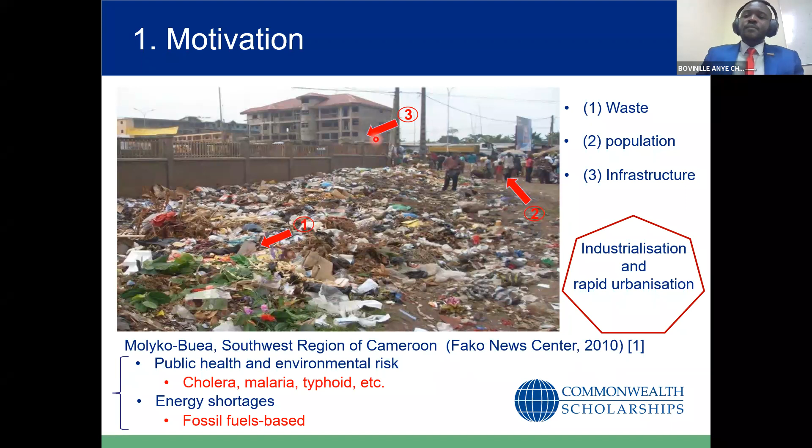Also, the continuous dependence on fossil fuel-based energy sources to meet up with the energy demands of these rapidly developing countries has brought about serious global environmental challenges, such as resource depletion, environmental degradation, and energy shortages. So there is an urgent need for clean and renewable energy to meet these energy demands such that we can have electricity generation, transportation, and heating in a sustainable manner. With this in mind, my target is to achieve this clean and renewable energy by simultaneously treating waste organics while producing clean water and energy.

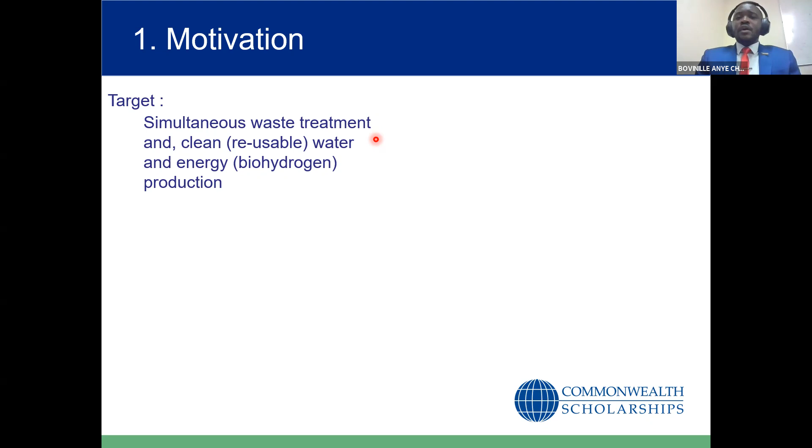Now, to visualize this concept, I put forward this schematic where you can see a typical source of waste stream, in this case industrial wastewater, being biologically treated by two major techniques: dark fermentation and photofermentation. The main difference between the two - let me start by saying fermentation is just a process whereby a microorganism can metabolize or feed on the organic portion of the waste stream. And in the process, they release byproducts. Some of these byproducts are biohydrogen, which we are interested in, and a small amount of CO2.

Because the process can either require light or not, it's often termed dark fermentation when the microorganism doesn't need light, and photofermentation when the microorganism requires light.

Having understood that there are two biological approaches to handle this waste and produce energy as biohydrogen, with the residue being water you can reuse for agricultural or other purposes, I also want to point out that what you see here is an indication of a container, a container which houses the mixture: the waste, the microorganism, everything in there.

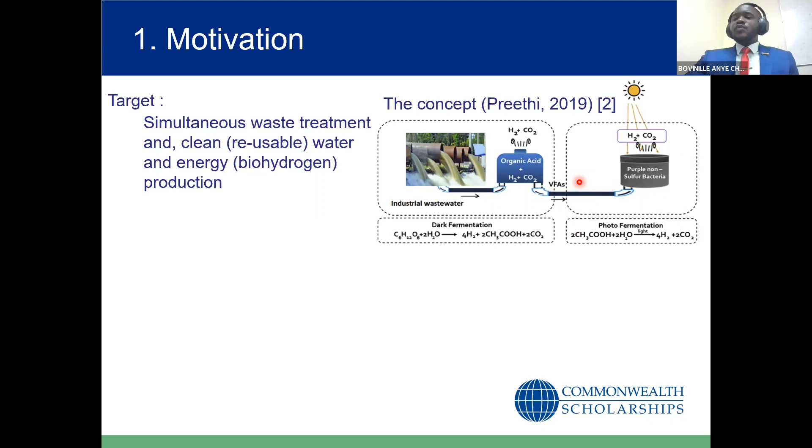But first, it would be nice to see how a wastewater treatment plant looks like. Typically, this is how it looks. And when I say a wastewater treatment plant, I don't want to limit your thoughts—also think about sewage, since sewage sludge is treated in the same manner. The technology we propose can handle all of this. So it's going to look like this.

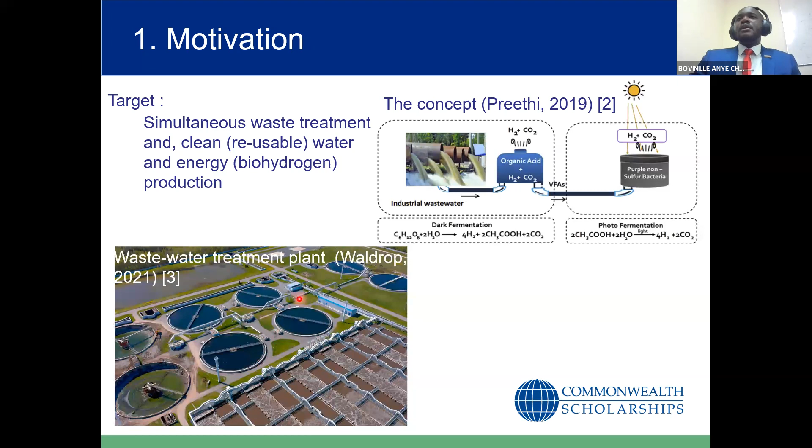By the end of it, we'll be achieving 3 of the UN Sustainable Development Goals: Goal 6, clean water and sanitation; Goal 7, affordable and clean energy; and Goal 13, climate action.

So I guess by now you're beginning to see the significance of the work, why it was awarded the 2021 CSC Research Impact Award for climate change related research.

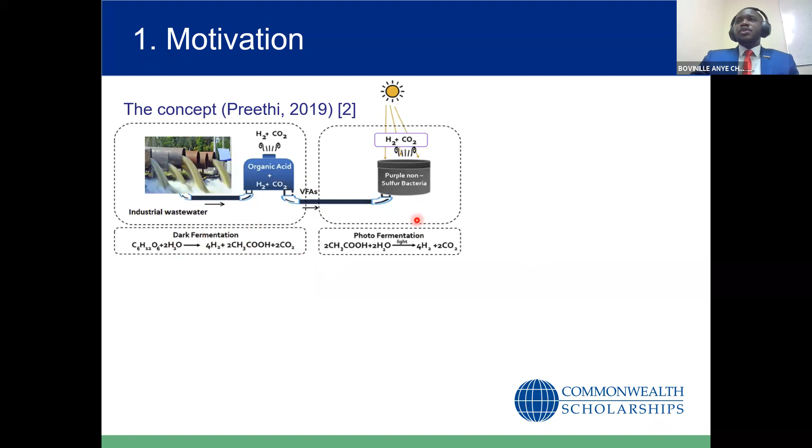But first, let's go a little into the technical aspects of the work. If we revisit the two methods of handling this waste—dark fermentation and photofermentation—and do a comparison, we realize the photofermentation approach is very efficient, with almost 90% conversion rate.

So one is tilted towards photofermentation in such a way that the residue, or end product, from dark fermentation is further photofermented so you can get maximum biohydrogen from the process. Now the obligate requirement of light by this photofermentation process poses significant challenges.

The first challenge is light attenuation. This concept of light attenuation is something you're going to be hearing throughout this webinar, but for now I'd like to put it into perspective so you can see it. Light attenuation is first defined as a physical phenomenon—let me use 'physical' because you can actually see it.

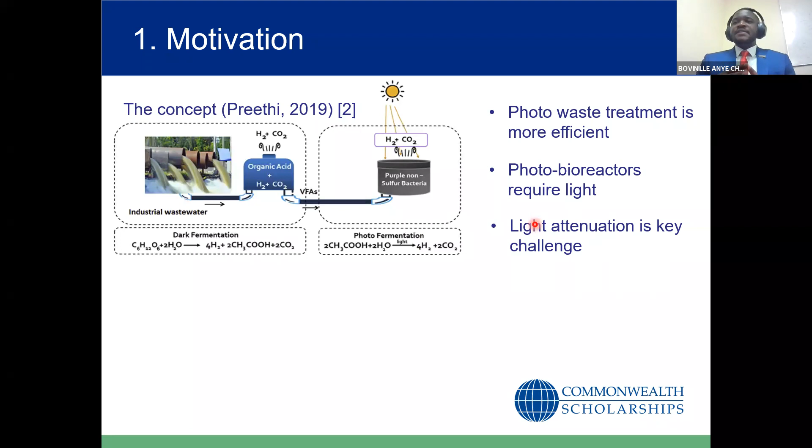The incident light intensity decreases within the reactor. What do we mean by that? At the start of the process, remember the container I mentioned? It's called a photobioreactor now because it allows light to come through. Our light rays are coming through, and we have our waste organics as well as our microorganisms in there.

That physical phenomenon of light attenuation can be seen here: the incident light intensity—this portion has light and this portion is dark. So 90% of the light is absorbed within a few centimeters of the reactor and the rest remains dark. This has consequential effects on the overall productivity of the system because the microorganisms require light.

If they're in the dark region, they're not getting light, so they're not growing. Instead, they use some accumulated carbon source or storage of energy to maintain themselves and stay alive, which we don't desire—we actually want them to convert the waste into our biohydrogen.

At the same time, cells within the region of light experience such high, harsh light intensity that they undergo a phenomenon we call photoinhibition—the light inhibits their growth. It doesn't kill them, but it inhibits them.

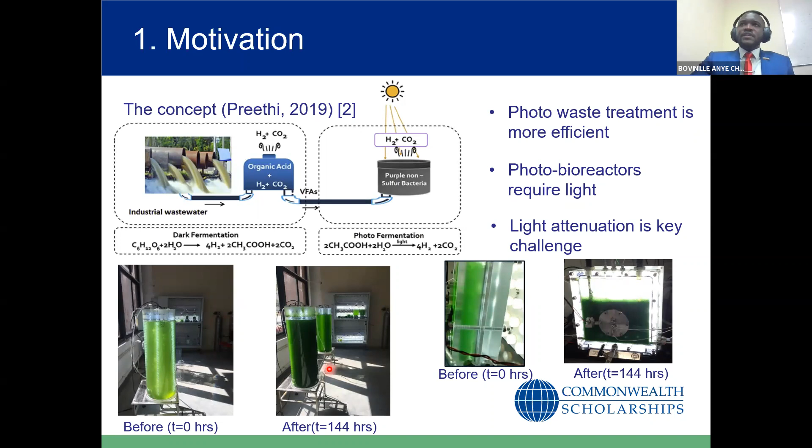So having discussed this, let's go into the methodology section and see what I've been trying to do to address this issue. But first, to understand what is happening, we need to zoom down into the photobiotechnological operation and really see what's happening.

By that, I mean if we look at the light field, the radiation, the time taken for the photosynthetic active units—these are units, or pigments, that can absorb light, and that light is used for growth—the time taken for them to absorb that light occurs within milliseconds. But the time taken for that absorbed light to be used for cell growth occurs within a few hours to days in some microbial species.

Now, that time difference from milliseconds to days creates a time scale which is very different, which we need to capture. Also, within the cells, the metabolic reactions are occurring in a micro scale, while mixing of the reactor and fluid dynamics, everything is in a macro scale. So we have also a micro scale and a macro scale.

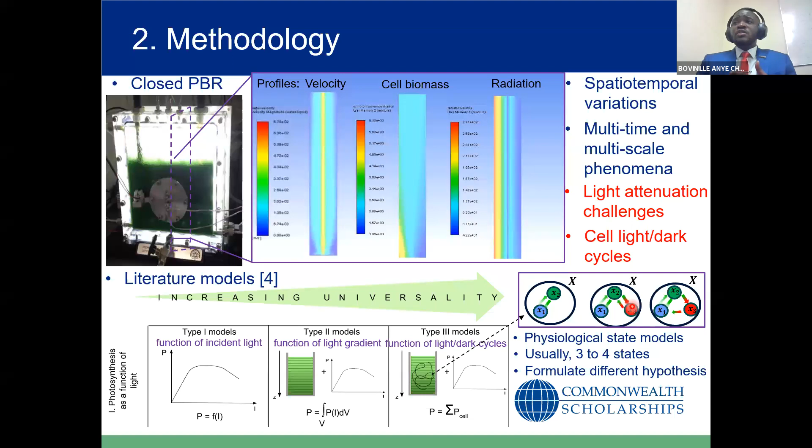But now, amongst these models in literature, there's one particular one which really stands out and it's very relevant to this work. This is the 3-state photosynthetic active unit model that was proposed by Eilers and Peeters in 1988.

The model assumes that the photosynthetic active unit of a cell, of a microbial cell, can be in an open state, closed state, and an inhibited state. The probability for it to be in any of these states equals 1.

In the open state, it's inactive, but it can capture light and become active and move into the closed state. In the closed state, it has 2 options. Because it already has light in it, it can use that light for photoproduction, and then it returns back to the open state.

Otherwise, it can capture more light. Since it was already light saturated, capturing more light makes it become inhibited, and it moves into the inhibited state. In the inhibited state, it can slowly recover back into the closed state.

Now, if we can describe this state transition within the reactor, then we've solved the problem. We can describe how light intensity is affecting the cells as they're growing, and we can see how we can solve the issue. So this transitioning among these states is described by 3 ordinary differential equations.

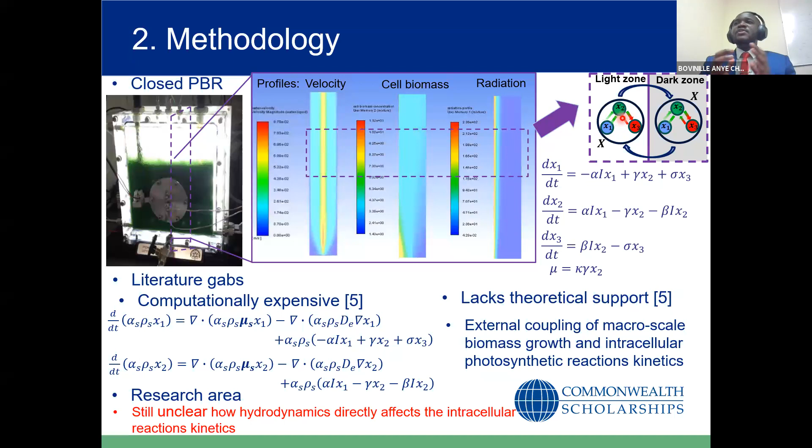So it's now clear that it's still unclear how hydrodynamics, or fluid mixing in the reactor, directly affects these photosynthetic active unit states within the cell walls, not outside of the cell. This led us to proposing a hypothesis. Before I go into discussing the hypothesis, it would be nice to explain what's happening.

If we consider the light field within the reactor, we observe physically from experiment that cells positioned here and cells positioned there are receiving different light intensities, or cells positioned anywhere within the reactor receive different light intensity at any point in time.

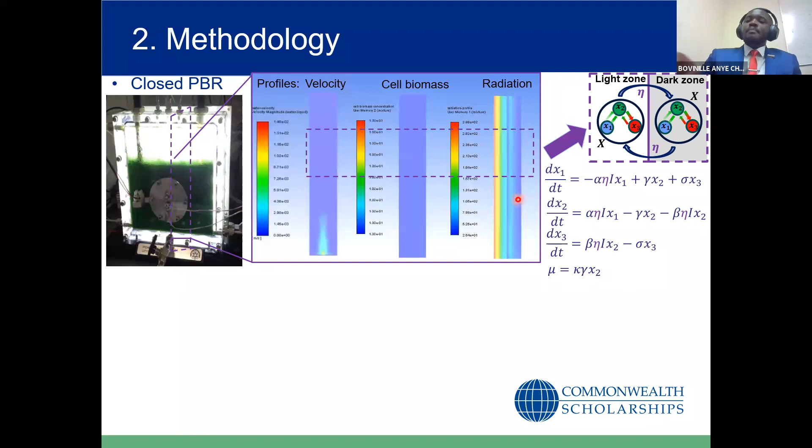But as the cell grows, one cell at one position will next be somewhere here, and another time somewhere there. So throughout its history, it experiences a light intensity different from the light intensity it receives at any given point. Based on this, we can say hydrodynamics, the mixing in the reactor, can actually influence the cell as it moves and directly affect the PSU states.

With this hypothesis, we're able to formulate 3 new ordinary differential equations, which capture the effect of fluid dynamics on the PSU states within the cell walls, not outside of them. By considering pseudo-steady state and solving this equation, we end up with the macro scale growth kinetics. The macro scale is now the scale where we have fluid dynamics, mixing, nutrients in the reactor, and waste organics.

In this approach, the model we get has parameters which are actually the PSU light and dark reaction coefficients. When we compare this model with the literature model, we discover it's very similar - the substrate saturation coefficient and substrate inhibition coefficient are actually ratios of these light-dark reaction coefficients.

Therefore, only one parameter, which we call eta, the effective light coefficient, has not been defined here. According to our approach, we come up with one parameter which needs to be described, and this parameter is responsible for the cell light exposure history on the macro scale growth model.

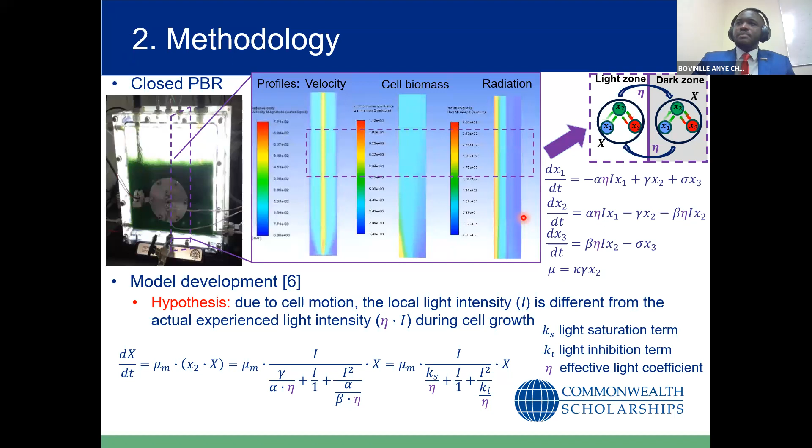At this point, one can think we've sorted it out and everything is fine. But we've not considered the effect of light attenuation - the distance from the front to the back of the reactor. So we need to incorporate a model that can describe how light intensity decreases with distance in the reactor.

The famous model in literature is called the Beer-Lambert law, which says the incident light intensity exponentially decreases with distance, with the light path length of the reactor, due to gas bubble scattering and cell absorption.

When we take this model and substitute it into the place of light intensity in the equation, we end up with the final macro scale growth model, which can capture the influences of cell growth in the macro scale as a result of light attenuation and light exposure history in the reactor.

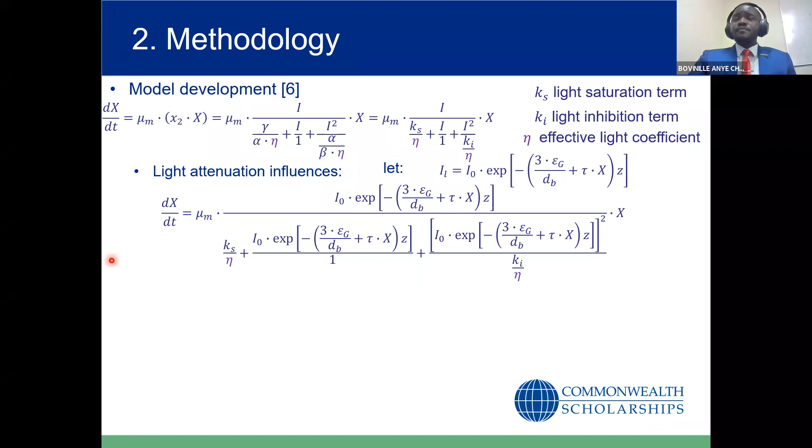Now the model looks fine, but still we don't know how this light exposure history directly affects the macro scale growth kinetics of the cell model. So in order to do this, we design scenarios and studies to investigate.

The chosen photobioreactor is the flat plate photobioreactor because it has a high surface area to volume ratio, so it can easily be scaled up for industrial purposes.

When we consider the flat plate photobioreactor, we have two test scenarios. Scenario one, where we are controlling the influence of hydrodynamics in the system.

We have a sparger, which is just a device that allows bubbles to go into the reactor. As the bubbles rise, they displace water in their path, creating chaotic mixing in the system. When we change the configuration from one sparger to two spargers, we can increase the influence of mixing in the system.

We are interested in seeing how this increase in mixing affects the cell growth in the macro scale. So we investigate different inlet gas flow rates from 0.1 to 2.0 meters per second, as well as different photobioreactor configurations - one sparger versus two spargers.

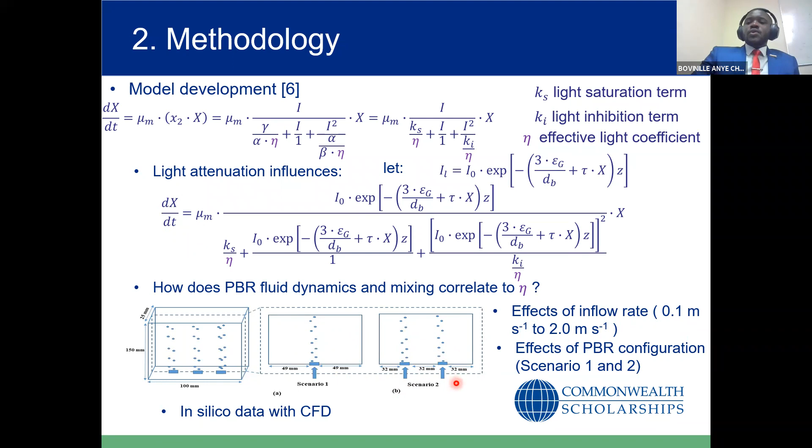So this is good in terms of the design of experiment. But now, how do we actually visualize the results? We use computational fluid dynamics.

For computational fluid dynamics, we have to solve this partial differential equation - the biomass transport equation, which says the cells in the reactor are moving as a result of a velocity factor pushing them around, as well as a diffusion factor spreading them around, and the growth or destruction term in the reactor.

One thing to notice here is that the effective light coefficient is not included in this model, because this model is solved at each point in time.

But we still need to be able to capture the effect of light intensity and light exposure after a certain period of time when the cells have grown.

So we do parameter estimation, but this time the macro scale growth model is presented with the influence of both cell distance - the attenuation distance of the reactor from 0 to L - and also time. We eliminate the distance component to simplify the model so we can perform our parameter estimation.

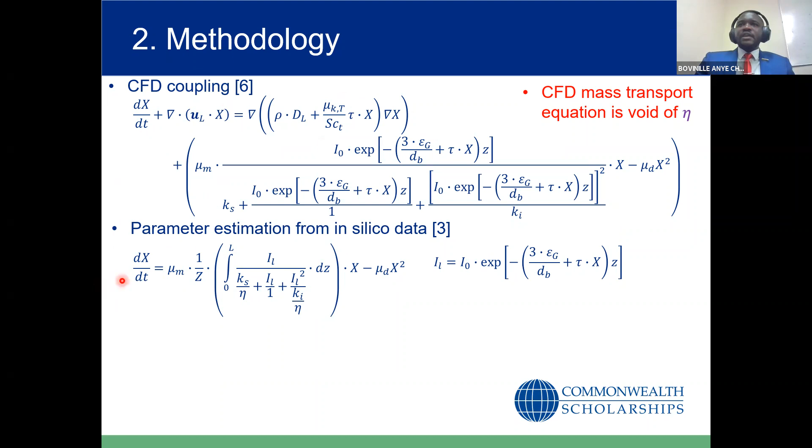So we can estimate the value of this effective light coefficient in the system. But after simplifying, the model is still highly nonlinear, so we use hybrid stochastic optimization algorithms to estimate the value of these parameters and describe the influence of the light-dark cycle on the growth of the cells.

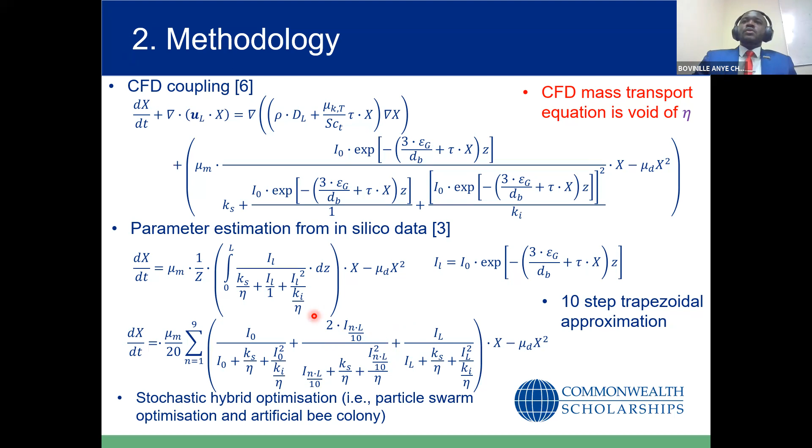So with such a result now, in presenting the results, I'll first of all present some cases.

So I'll split the results into 3 sections. So this is section 1.

Before I go any further with the results of section 1, I've presented just the first case because the 2 cases, scenario 1 with 1 sparger, and scenario 2 with 2 spargers, actually have similar trends. So by having similar trends, I'll present just the results for 1 sparger, and then we can make the assumption of what is happening in the second sparger.

For the first sparger, we see that there's a dynamic motion from the bottom of the reactor to the top of the reactor in a random oscillating plume. What we can interpret is that the plume is displacing water on its path and creating mixing in the system as the process is evolving.

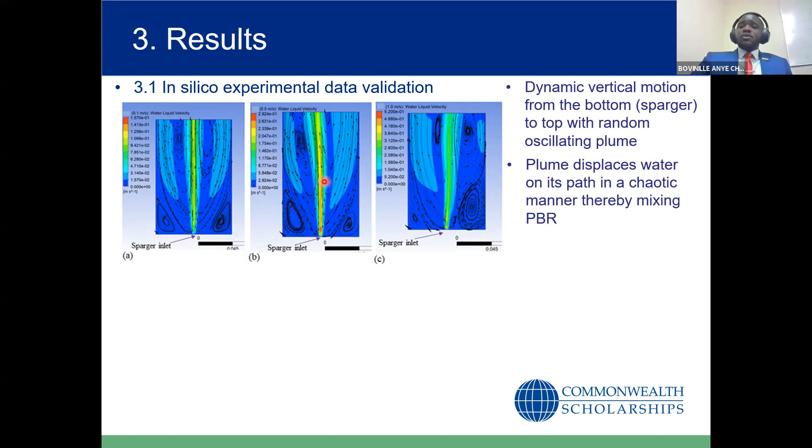Also, we compare the kinetic turbulent energy in the system, and it correlates well with the region where there's chaotic mixing in the system. These observations are common for both scenario 1 and scenario 2.

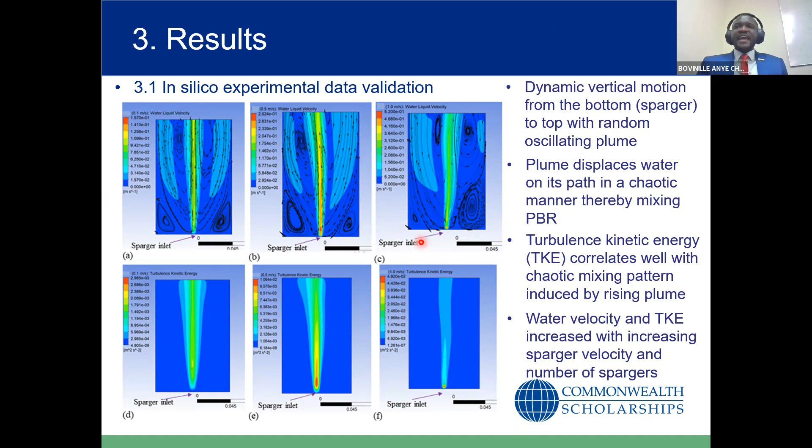Also, we see that by increasing the gas inflow rate from 0.1 up to 2.0 meters per second, the liquid phase velocity as well as the turbulent kinetic energy in the system increases. All of this is in agreement with literature findings. So far, we are confident about the results.

Now, looking at the second part of the results, which is the effect of gas inflow rate on biomass growth rate.

This figure shows how the biomass grows from mixing condition of 0.1 to 2.0 meters per second. What we see here is that, first of all, the trend shows a sigmoid shape, which agrees with literature and confirms that the multi-scale coupling approach is accurate.

Also, we see that as the gas inflow rate increases from 0.1 meters per second to 2.0 meters per second, the saturation cell growth rate increases from 4.2 to 5.0 grams per liter, an increase of just about 17%.

Now, in order to explain this amount of increase, we look into the velocity in the light transmission direction. We see that there's about a 300% increase in the velocity along the light transmission direction.

We can attribute this increase in growth rate as a result of better mixing in the culture, since the cells are frequently transited from the dark region into the light region and back and forth.

So having explained that, we also see that although there's about a 300% increase in velocity, the biomass growth rate increased just by 17%, which is not a dramatic value. This actually implies these results were expected, because at 0.1 to 2.0, the system was already operating in a turbulent state.

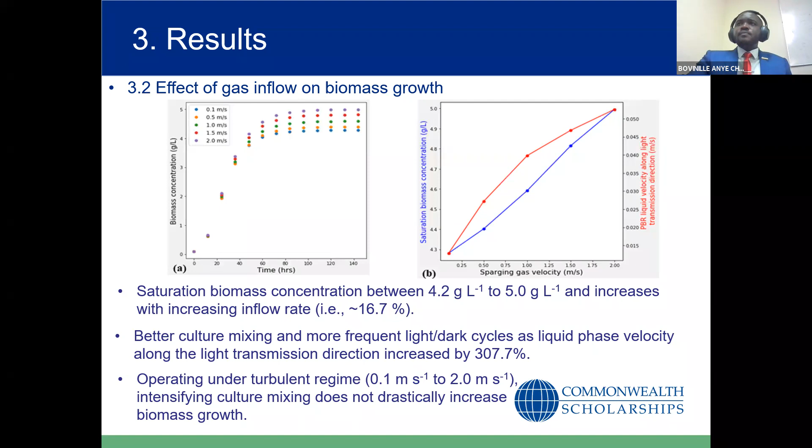Now, if we look at the third part of the results, where we want to correlate the effective light coefficient with the mixing in the system, or gas inflow rate.

From the estimated parameter value, we can also look at how it correlates with the gas inflow rate in the system. What we see is that generally, the effective light coefficient for both cases was greater than 1. And greater than 1 means that cells in the dark region do actually absorb light. But how is that possible?

It can only be possible if they are brought from the dark region into the light region. And these results cannot be explained by any other model in literature. So it actually shows why this model is outstanding, because it can capture that effect.

Also, we see that by increasing the gas inflow rate, you also increase the effective light coefficient. So you're increasing the rate at which you're moving the cells from the dark to the light region, and it's also increasing the rate at which biomass is growing in the system. So the correlation makes sense and agrees with our expectation.

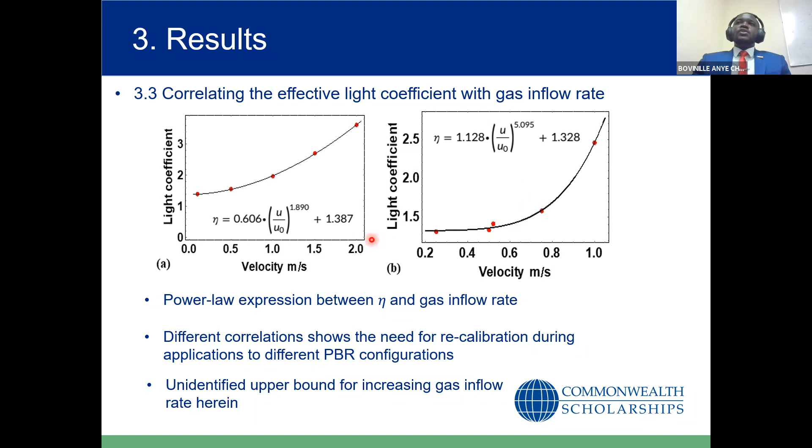Our investigation was limited to 2.0 meters per second, but we acknowledge that by increasing the gas inflow rate beyond this, the model might take a different form. So this model is only valid within this range. Outside of this range, you might need to formulate a different model. This is part of the future work which we are going to investigate.

But let's move into the future work and see how this model is creating an impact in the field. Before I go further, recall that at the beginning, when we start the process, the light intensity is fine within the system. We get almost a uniform light intensity because the cells are sparsely dense, and everything is fine, so they're happy. But then because they're happy, they start growing. When they start growing, the cells become really dense, and the light becomes attenuated. So we get light only from here to here, and the rest of the side is dark.

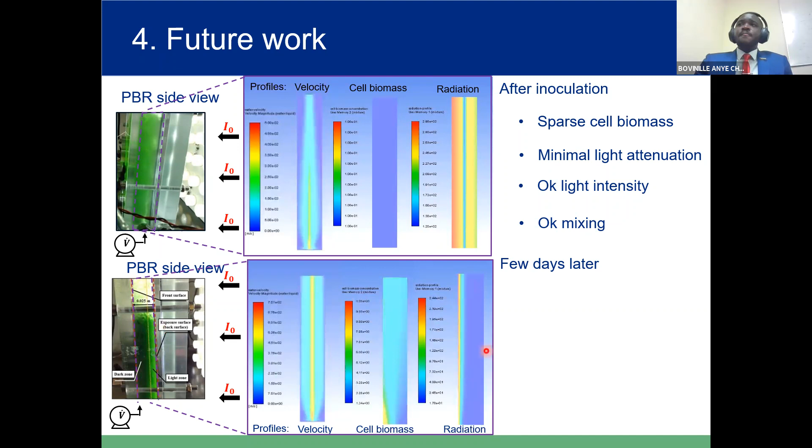This light attenuation can be addressed in two manners in literature. The first one is to increase the incident light intensity. When you increase the incident light intensity, the stronger radiation is going to penetrate deeper into the culture.

The second approach is to increase mixing in the system. When you increase mixing, cells in the dark region are going to be moved into the light region, and cells in the light region are going to move into the dark region.

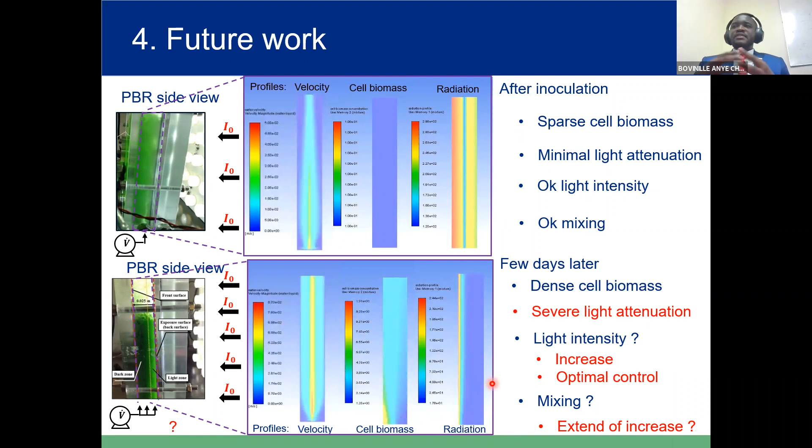But in literature, only the optimal control of the incident light intensity has been proposed. The extent to which you can increase the input gas inflow rate into the system to maintain an optimum light-dark cycle is still not known in literature. This is where our model comes in, because it can address that for the very first time.

If we come back to this plot, we see this is our system, right? So we have light attenuation within the system. But first, we need to know how many cells we have in this system, how much biomass we have in this system. So we calculate the cell growth with this model.

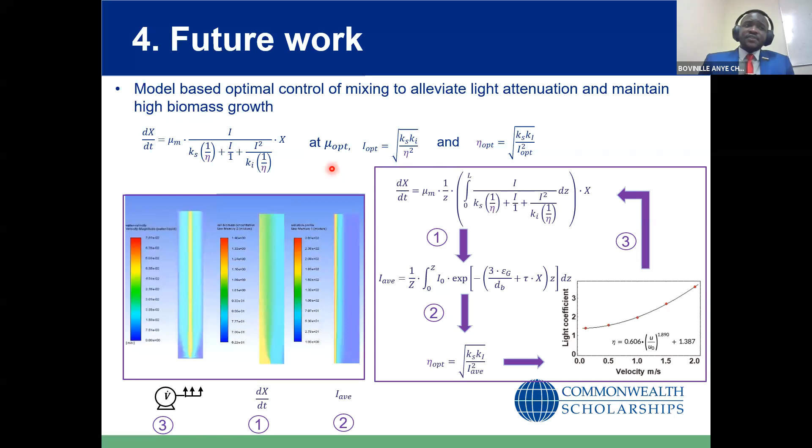At the time this work was submitted for the CSC Research Impact Awards, I had done only this, but as of now the work has been extended. We have published another paper. This time, if you remember, the model was specific to a photosynthetic microorganism, which is microalgae and cyanobacteria. But we also have photosynthetic bacteria, which have proven in literature to be effective in treating very recalcitrant wastewater streams. So if our model works, it should be applicable to all of these microorganisms.

So this work focused on a different type of photosynthetic microorganism, which is photosynthetic bacteria. And what we're looking at is to be able to capture the effect of not just light and light attenuation and the light attenuation distance, but also to capture the effect of temperature.

Temperature is another parameter which is very sensitive, because in real life these cells can be operated, or the bioreactor will be operated, in the outdoor condition. And in the outdoor condition, we know the temperature fluctuates as well as the light intensity throughout the day. At noon you get the highest or the peak, and somewhere at nightfall everything goes down.

So if our model can describe the influences of temperature, light intensity, light attenuation, and the light exposure history, then we can model and predict what's going to happen in the outdoor conditions. We also incorporated the aspect of upscaling from the lab scale into the pilot scale of the operation. And our model agreed really well with the experimental data, and this led into this publication.

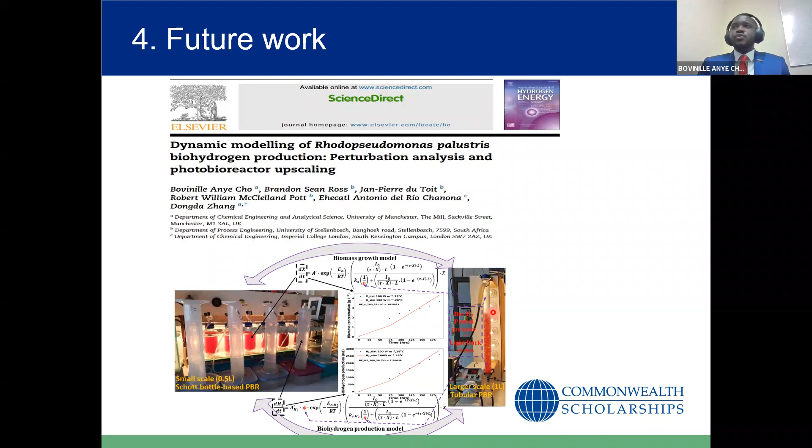So further and future work that I'm working on is designing an optimal photobioreactor that can take into account all of this knowledge so far, and make sure it can produce hydrogen or continuously maintain the optimal hydrogen production for a long duration. Having presented this part of the work, I will now go into discussing my CSC Scholar experience.

The first thing I would like to say is it has always been my dream to become a leading researcher in the field of bioenergy and sustainable energy production. But I will also underline that without the Commonwealth Scholarship it wouldn't have been possible, because I currently can't afford the tuition and accommodation fees at the UK's leading institutions, such as the University of Manchester and Imperial College London.

Since the start of my scholarship in 2019, I have harnessed solid mathematical programming skills using software such as MATLAB and ANSYS Fluent. These softwares present engineering tools that can be used to address 21st century problems. However, they require licenses which are expensive to purchase. As a student at the University of Manchester under the Commonwealth Scholarship, these licenses are made available to me for experimental hands-on learning. I'm truly grateful for that, because without it I wouldn't have had access to them.

Also, I've been able to expand my network within the UK, that is Imperial College London, University of East Anglia. Outside of the UK, that is South Africa, Stellenbosch University, where I did my master's degree, as well as China, at Xiamen University. This collaboration network forms a vital part of my future career, because I plan to establish a wastewater treatment plant and a biorefinery in Cameroon. I already have a solid team of experts that I'm working with as of now.

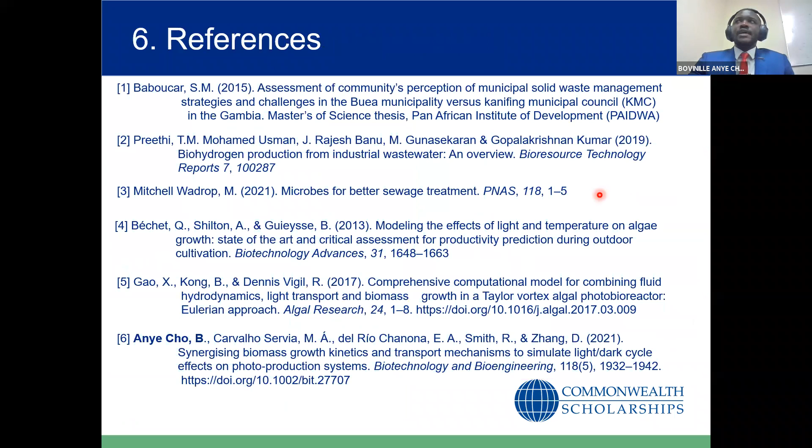Finally, I would like to say, with this experience, I have been able to develop capacity on writing high quality scientific papers. As of now I have 5 under my belt, and I'm still to publish more. This reflects the impact the Commonwealth Scholarship has had on developing my career as a young and emerging researcher in the field of bioenergy and sustainable energy production. So I want to thank the Commonwealth Scholarship for this opportunity, and this concludes my presentation, as these are just some relevant references for those who are interested. And thank you.